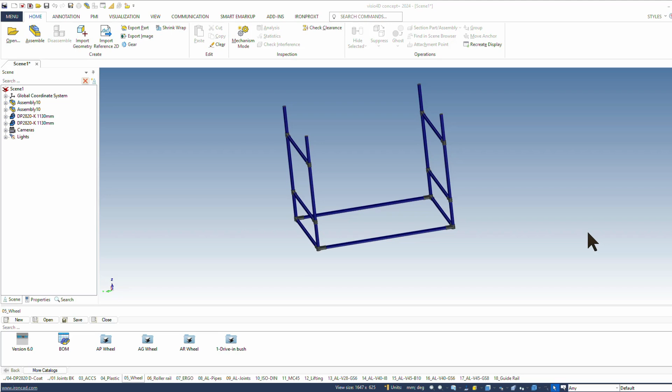To do this, I'll start by inserting the drive sleeves at the bottom. The drive sleeves are for the wheels. I've already got them in there. Drive-in bush, I'll select them.

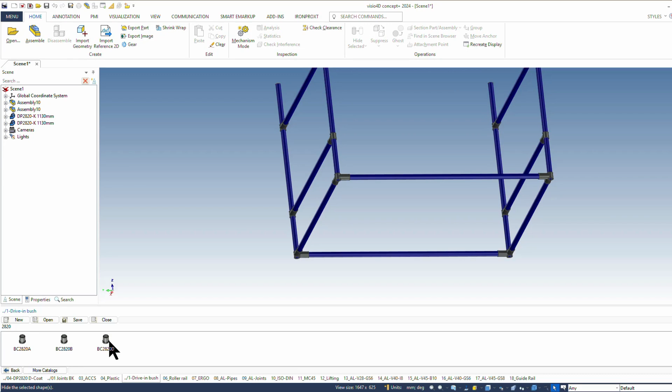I can enter 2820 up here. That's basically the code of the drive-in sleeves. BC 2820. Then we've got 3 to choose from, an A, a B, and a D version. The A is the half size, B is MM12, and D is MM10.

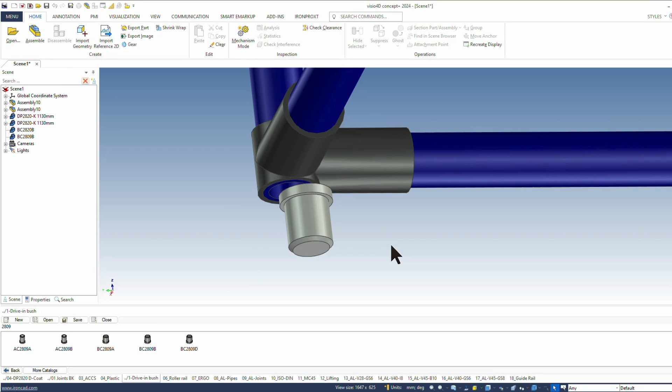If they didn't have the right magnetic alignment point, in other words, I'd now take the 0,9, and if I were to slot a 0,9 in, it would sit like that - just wrong. And then I realize, oops, something's not right. I could do that 20 times, and it would always be wrong. Then I realize, oops, I've made a mistake. I need the right insertion sleeve, and when I put that in, it slides neatly into the pipes. Right.

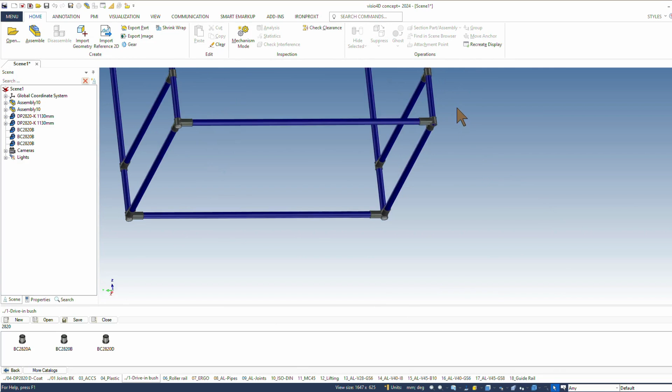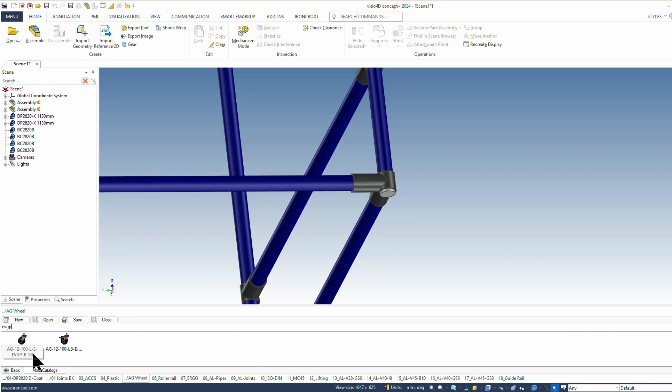The right wheels are the AG wheels with the threaded spindle. I know it's an EVGP tread, and now I've got 2 to choose from: 100 diameter, 1 swivel caster, and 1 swivel caster with a brake. That means I could now fit 2, whether at the front or the back. But I could also fit 4 swivel casters.

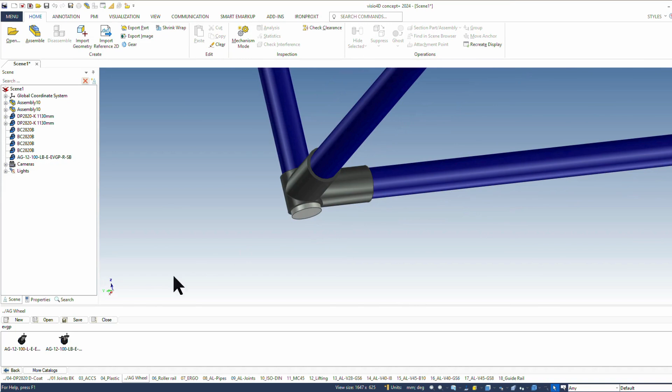I'll fit them in. Hopefully, these will also have the right attachment points. Suitable magnetic points simply have to be defined. Right. Now we've got 4 swivel casters fitted up there. In theory, I could already turn or swivel them a bit now.

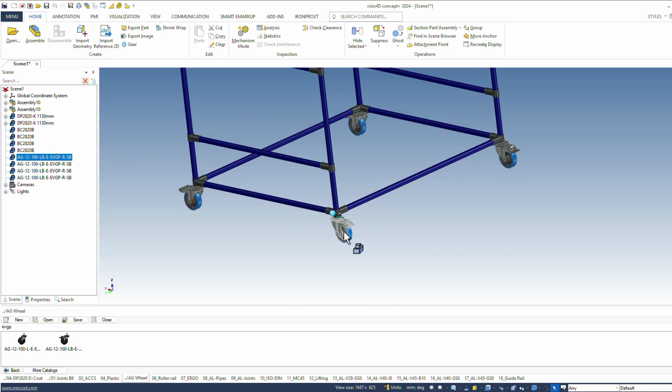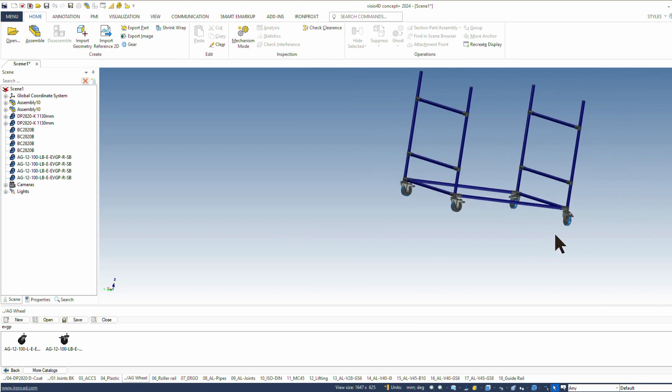At this stage, at the very latest, I should save this, because at the moment we only have 1 scene. That means the component hasn't been saved yet. Don't wait until the end, because it's actually quite possible that the program might crash at some point. As with many CAD systems, that can happen.

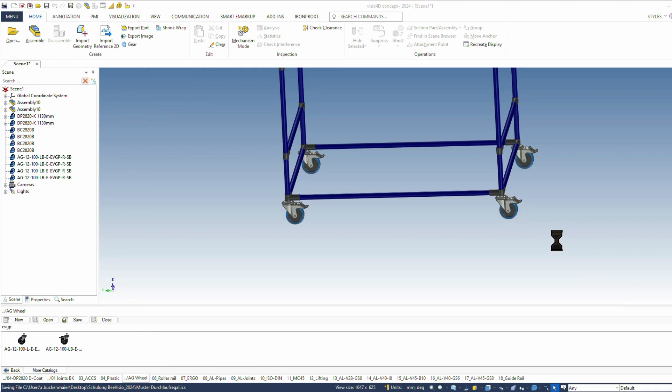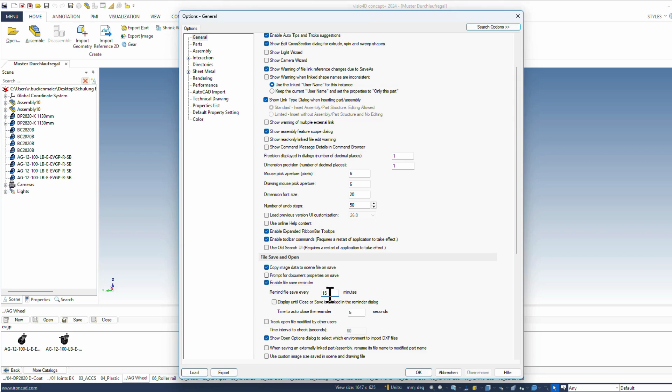There's an option where I can go to the options menu and reduce the frequency of the save every 15 minutes prompt, so that I get a reminder every 10 minutes to save the file. There isn't actually an automatic save function as such, just a reminder. Right.

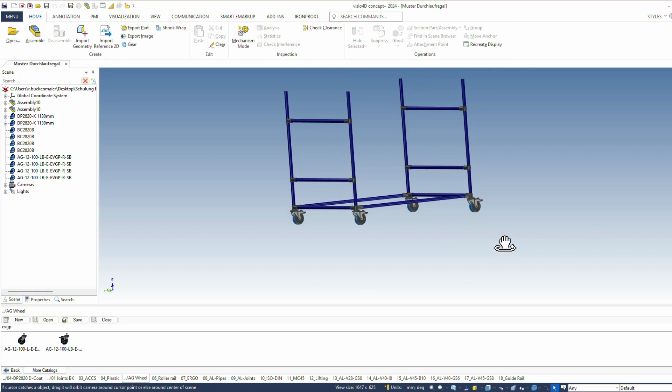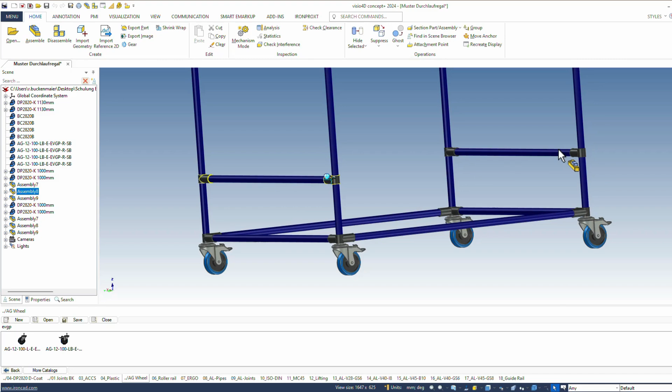To carry on, to edit a plane, I'd say I only ever use 2 rods. But I can say that I use, well, this is the top level assembly now. I'd almost open that one up again, the top level one. And I'd open that one up too, because I always need a new layer individually, so that's these ones and these ones. I'd put those together into a single assembly.

Right, I just want to check the planned dimensions. According to the sketch sheet, it's about 1,000 wide and 1,300 deep, just to fit the right containers in.

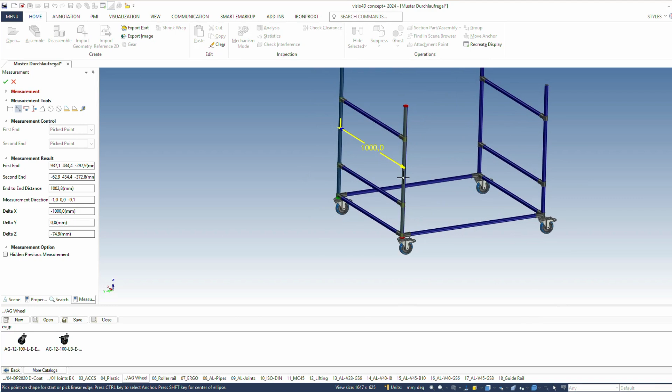I can go up to the top now and have a look to see what I've actually got. At the moment, I've got 1,000 millimeters inside, but in terms of depth, only 1,200. That means the feature should actually be 100 millimeters deeper.

To do that, I definitely need to exit measurement mode again. Now I can select all the features. There's a command up here, extend component stretch. I can also cut, but I generally always use the stretch command.

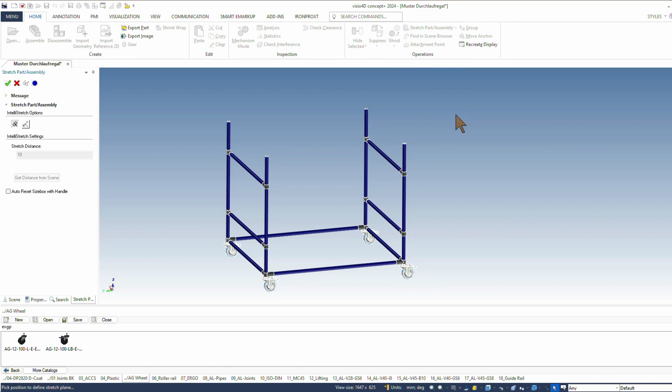The stretch command means that I first need to select a face and decide along which cutting axis I want to stretch the feature. I'll now select a connector here, the end face. It's already shown a small face here. That's my cutting plane along the X and Z axes.

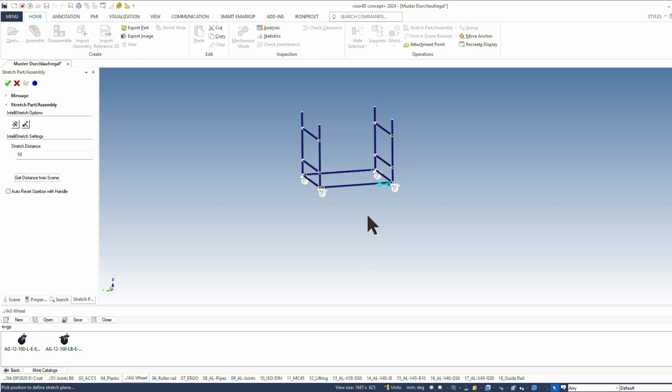Don't be misled into thinking that this only represents a small area. It's actually infinite. That means this surface intersects everything in the entire space, regardless of whether the structure were 2 meters, 5 meters, or 50 meters long and 10 meters high. Anything it would intersect along the X and Z axes, it would, in principle, also stretch or cut through.

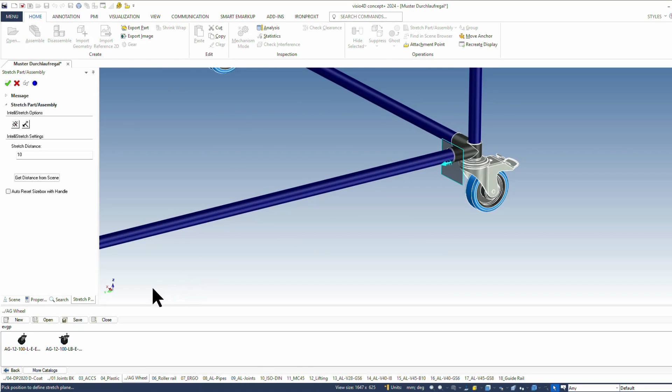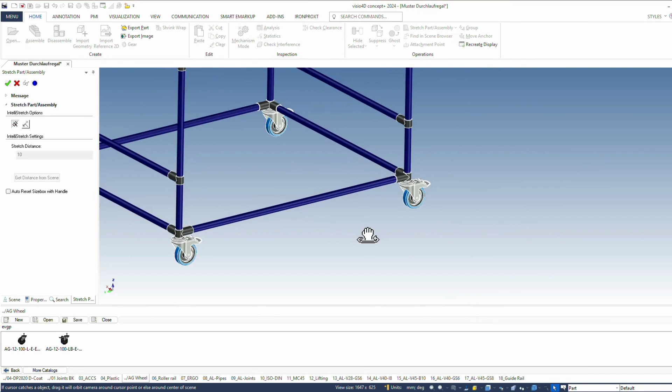I haven't switched it off. I've now moved my cutting plane in far enough that I'm sure I'm not cutting any joints, wheels, or connectors, but only the current long pieces.

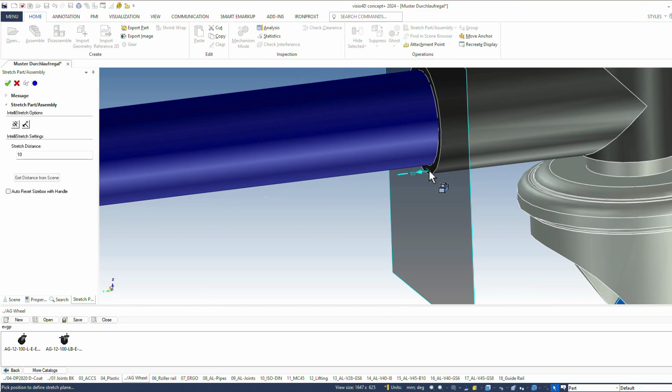And now I can specify again whether I want to select the left or the right. Now I'm extending or trimming everything that goes to the right. With this command, I can extend or trim everything to the left. I'll do this towards the back now.

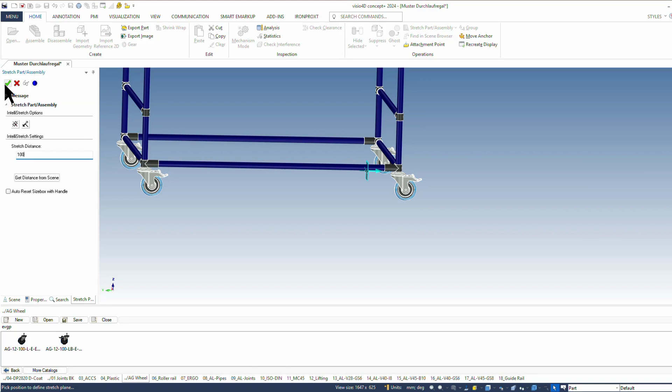I'll say the assembly should be 100 millimeters longer, and then, with that single command, it extends all the components that were to the right of my cut plane by 100 millimeters. Plus it cuts the pipes, cutting them at right angles, by the same length.